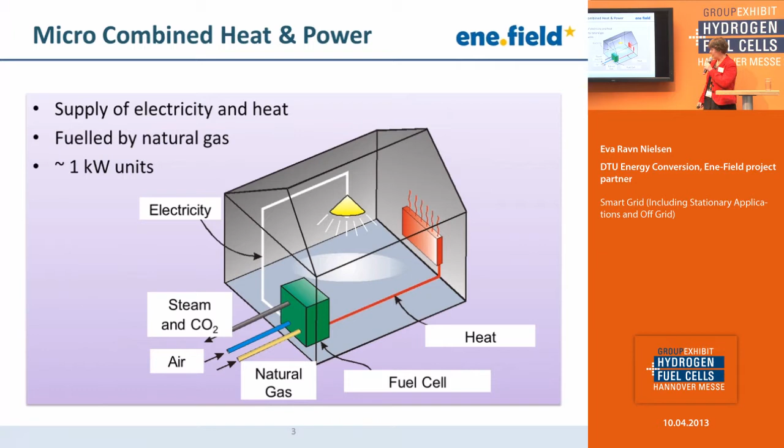Fuel cell micro CHP is highly efficient in electricity production. Compared to other cogeneration technologies, the electricity part is higher than the heat part. This makes this technology very useful for houses with low heat demand. As you probably all know, this is the direction European houses are going due to new building codes, where heat demands will become smaller and smaller. Micro CHP fuel cell based is a very good solution for this.

Further, fuel cell micro CHP is important for the future smart grid. It may help balance the grid by responding to the grid's need for additional electricity. It may be installed with an additional heat storage, and therefore it can maintain very high efficiency, even though it has to respond to grid needs and not only to the house's own energy demand.

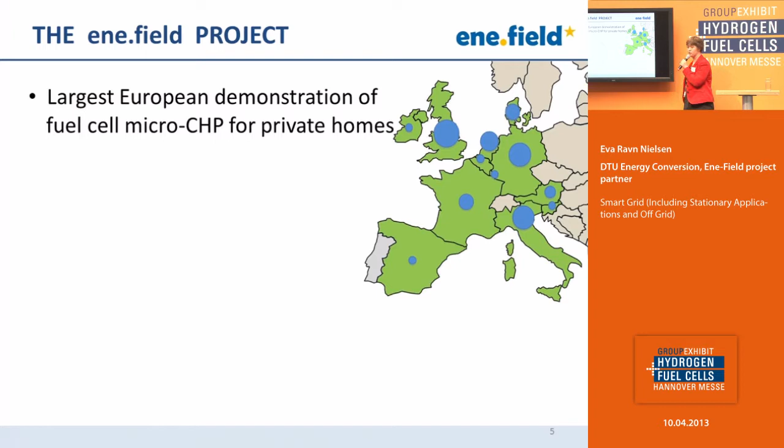Now, regarding the ene.field project: this is a high-profile project for the FCH Joint Undertaking. It is the largest demonstration project within stationary applications. It is the largest demonstration of fuel cell micro CHP units for private homes. It will install up to 1,000 units in 12 different countries over Europe. The project runs for 5 years, from last year until 2017.

The project consortium consists of as many as 26 project partners, which includes 9 large manufacturers of micro CHP units. It includes utility partners, as well as research institutes and universities, as the one I represent. The demonstrations include all the variants of fuel cell technology used in micro CHP, that is high as well as low temperature PEM fuel cells, and intermediate and high temperature solid oxide fuel cells. All these kinds of technologies will be demonstrated in this project.

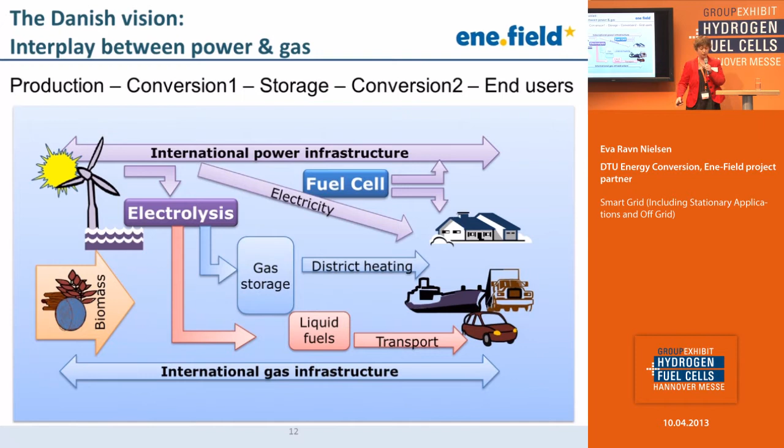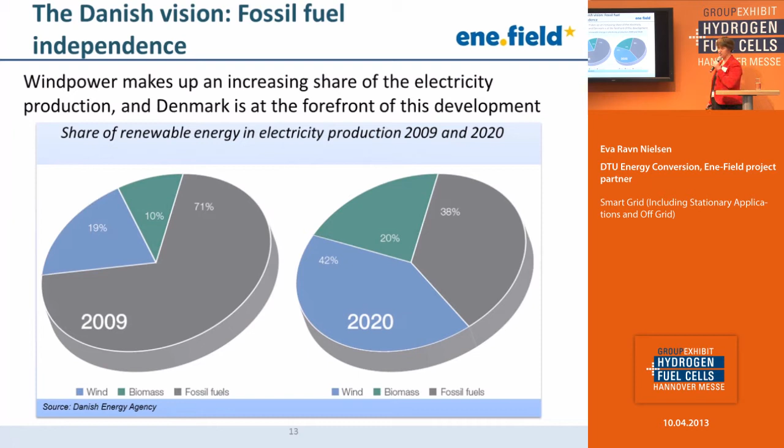To be independent of fossil fuel, wind power makes up a larger and larger part of the Danish energy system. In 2009, wind made up 19% of the electricity generated. Already today we are at 30%, and in 2020 it will make up 42% of the electricity production. This gives us some challenges, because sometimes the wind power is smaller than the overall energy demand. But already today, and in the future more and more often, the wind power covers all the energy demand and somewhat more. So we have to store this energy.

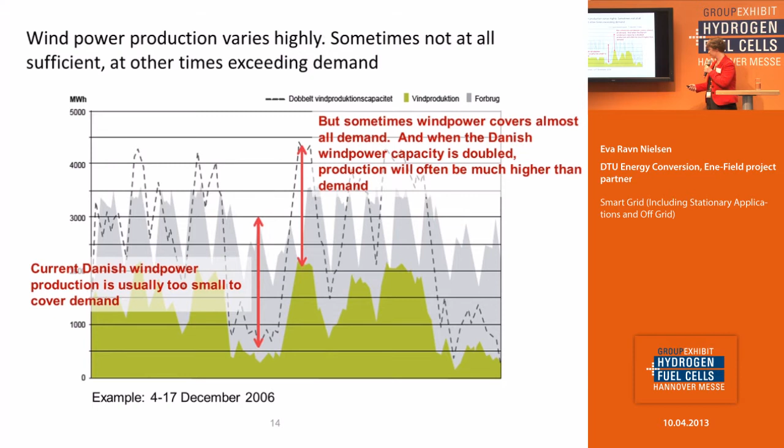Also, we have fluctuations on a short time scale. This is just to show you that from hour to hour, and within 15 or 20 minutes, there can be a very steep variation in what wind power is actually generated. Therefore, the grid needs balancing. Therefore, the future grid must be smart.

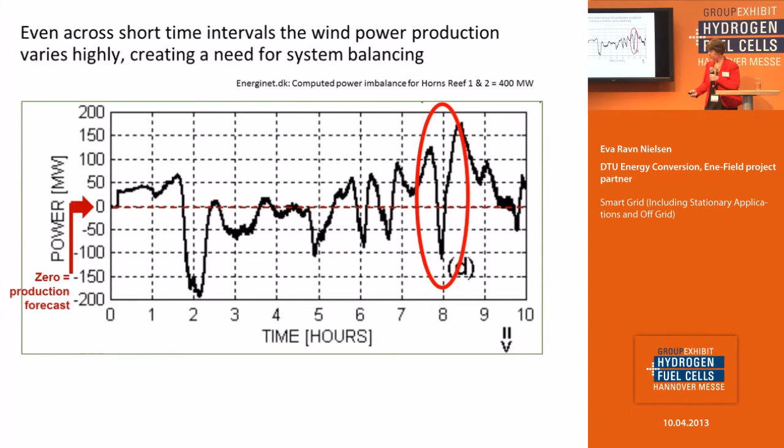So it was decided to take 4 houses equipped with micro-CHP based on fuel cells, and a communication protocol was made. Dong Energy has what they call the power hub that communicates and controls the energy demand. This was sending signals to fuel cell systems based on low temperature PEM produced by Dantherm Power, and the remote control software is already installed in the fuel cell control system.

There has been testing of 4 systems, 4 different houses in Denmark. They did not react on actual price signals; they were not depending on the electricity prices in Denmark. This was simulated by a schedule decided up front, but we were testing out if we send the signal, now the electricity price is high, you need to produce more to put electricity back to the grid, then the fuel cell unit should react.

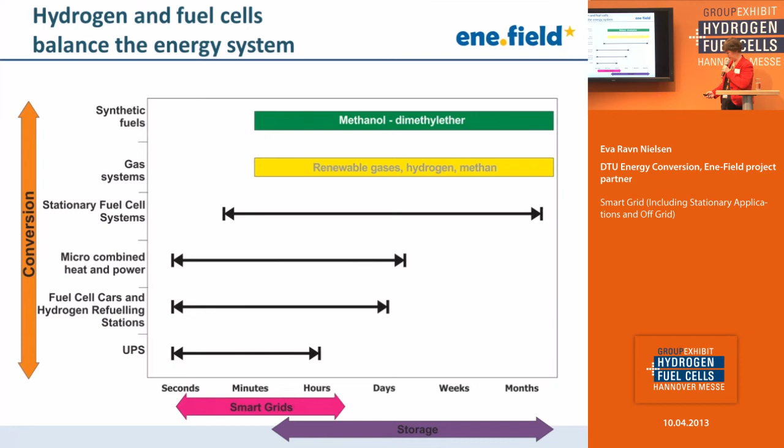The last project I will mention for you is the Smart Copenhagen project. I must say we have not started up yet. It's still under negotiation with the Danish Energy Agency, which is funding it. It will be a large-scale demonstration, megawatt scale, of electrolysis, hydrogen storage, fuel cells, and other hydrogen consumptions like cars and town gas. And this is going to start up just now and take place over the next years.

So, to summarize, micro-CHP is an important technology for the smart grid. And the large and important ene.field project offers opportunities, and we really want to go into more discussions with utility partners that would like to know more about this project and want to take part and be involved. So please contact us or partners. And I showed you that there are a lot of efforts in Denmark getting more knowledge on the smart grid, and I think this will not be the last thing you hear about the Danish smart grid efforts.

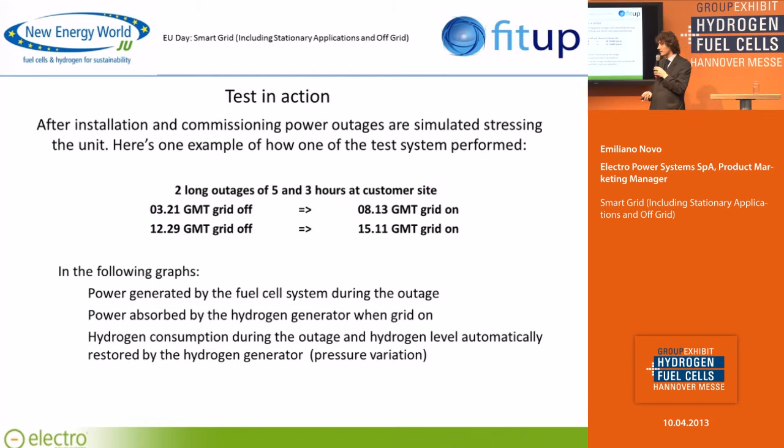Let me go back to this slide. This is a test in action where, after commissioning, we had 2 long outages, one of 5 hours and the other one of 3 hours. This is outside the FITUP project. This is a real exercise that happened in India.

Just to summarize, to focus on the particular application: when the grid is off, you can see that the fuel cell power system has to start suddenly and power the load. Typically, this is a telecom operator. Typically, a telecom operator has a load from 1.5 up to 3 kilowatt in a tower. If we are working in sharing or it is a very important tower, it could also increase to 6 or up to 10 kilowatt output.

So as you can see, in this case, we have a basic load of 2.5 kilowatt. When the fuel cell is running, the green line, the hydrogen pressure in the cylinder, decreases. When the grid comes back, the all-in-one solution, fuel cell and hydrogen generation, stops the fuel cell and starts to recharge the cylinders using the hydrogen generator.

But if I have another grid fault, I need to stop the hydrogen production and restart the fuel cell, another 3 hours. At the end of the day, when the grid is restored, I have the time to recover all the hydrogen in my cylinders.

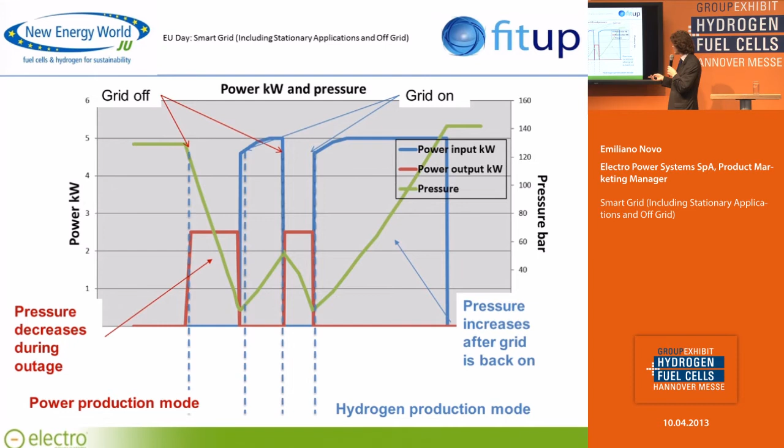After the experience of the poor grid, especially in Asia, we moved to thinking to use the ElectroSelf solution, that is the commercial product that Electro Power Systems sells, to couple the fuel cell and the electrolyzer with renewable sources, solar array or windmill. The fuel cell power system is a UPS solution only if you have a bridging unit that you have to put here.

You can put small batteries, you can put traditional batteries, or you can put nowadays batteries like lithium batteries, you can put supercapacitors as you want. But the point is that the kilowatt hours are stored in a chemical way inside the hydrogen tank.

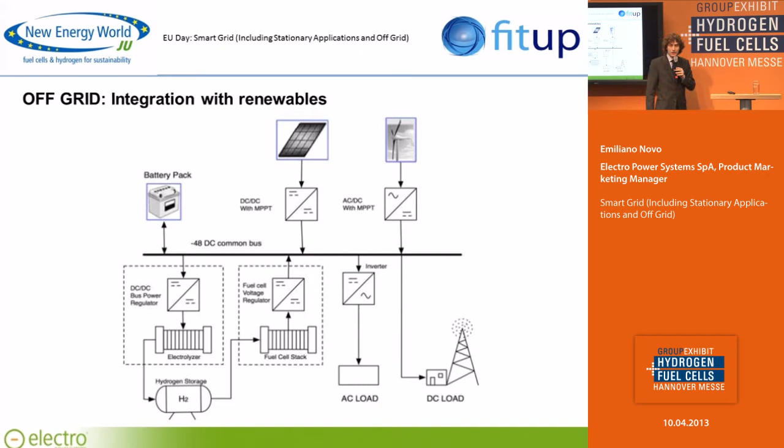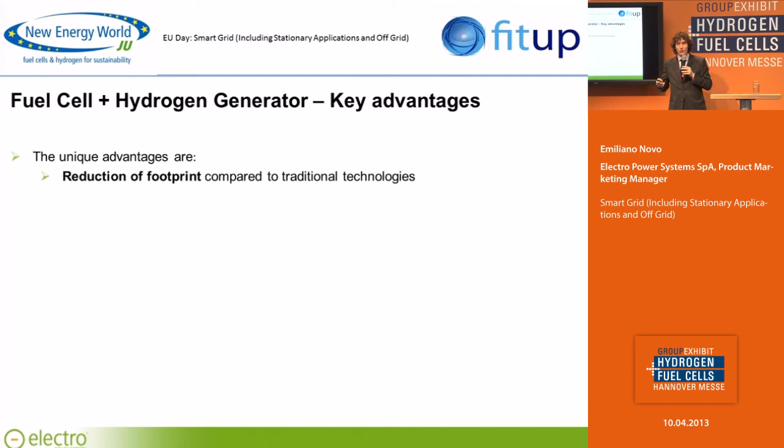The key advantages of this solution is the reduction of the footprint compared to the traditional solution, because you don't have to think about big batteries, or a big liquid tank for the diesel. Easy installation, because you have just to connect the positive and the negative cable to the DC bus. You don't have to think about a lot of electrical conversion, AC to DC, DC to AC.

Low maintenance needed. There is no rotating part inside the ElectroSelf product. It is a stationary application. So there is a fuel cell that is a static device. There is an electrolyzer that is a static device.

100% clean. Starting from electricity from the sun or from the wind and pure water, we can obtain again electricity when we need, because when we have plenty of renewables, we can produce the hydrogen. When we don't have the renewable sources, we reuse the hydrogen to obtain electricity without pollution.

The reliability of the system: it is a product based on the backup solution for telcos. Telcos ask to have 99.99% of reliability. So this is exactly what we need for the off-grid site where no one wants to go, in the middle of nowhere.

The flexibility and the modularity of the system is that you can have a solution from 1.5 up to 10 kilowatt on site in the same footprint, and you can have modularity: okay, my load changed because I started with just one single cell with 1 kilowatt load, but I need to increase because I have more customers in that area. I have to put other transmission devices. So I need to increase my power at site. I don't have to change everything in the site. I have just to add another component.

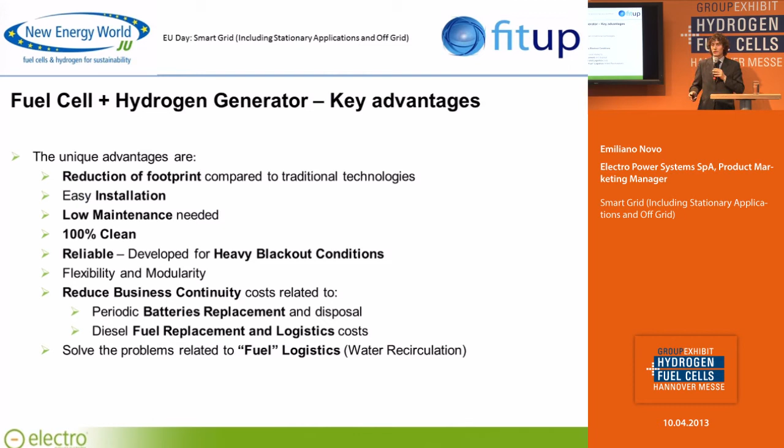With another innovative solution that we have in the ElectroSelf platform, we recirculate the water. So we're starting with demineralized water. We generate hydrogen. From the fuel cell, we have water as a waste. Why not recover it inside the starting tank? This is our internal solution.

And I link with the presentation before, the hydrogen is the perfect link with the irregularities that are coming from the renewable sources. So if there is a cloud that covers the sun, there is no electricity from the solar array, we need to start the fuel cell. And we can cover the gap of the electricity using the fuel cell. At the end, when the cloud is over, we can stop the fuel cell and generate new hydrogen.

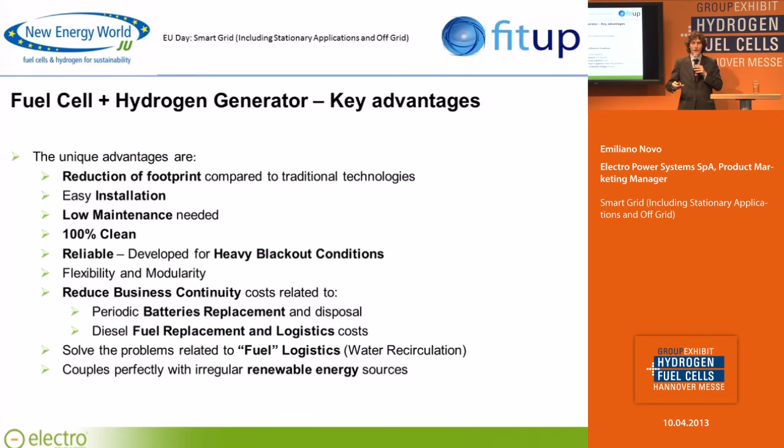The other important point of the Electro Power Systems technology is that coming from the water and the electricity, we split the water molecule into hydrogen and oxygen.

Obviously, for the fuel cell, we need the hydrogen, and also we need the oxygen. Usually, oxygen is taken from the air, but why do we have to disperse the oxygen and pay in terms of electricity with a blower to blow the oxygen inside the fuel cell? Our decision is to, in some applications, because we have two platforms. One is the AirTech platform, and one is the DOX platform.

So, in some applications, the DOX platform uses the hydrogen stored gas and the oxygen stored gas produced by the electrolyzer; when we don't have electricity, we reuse hydrogen and oxygen. In this way, we are increasing the total efficiency of the system,

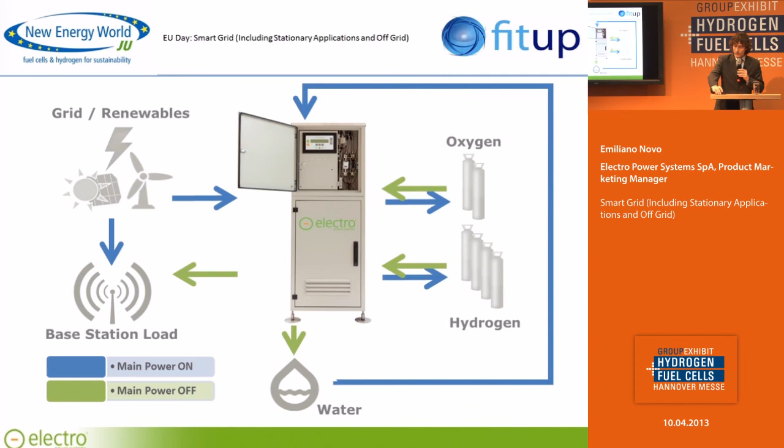So even in Italy, it is possible that there are some hills where at the top it is perfect to put a Wi-Fi antenna to cover a large area with WiMAX radio apparatus. But you have to spend a lot of money to connect this antenna to the national grid, because it is more or less 5 kilometers, and it costs 20,000 euros per kilometer.

At the end, you can have a solution with solar array and micro wind - even though the north of Italy isn't good for wind, we wanted to show in the pilot that it's possible to couple both renewable technologies with our solution. And we put - not the first prototype for the ElectroSelf platform overall, but the first prototype for the ElectroSelf coupling with renewables.

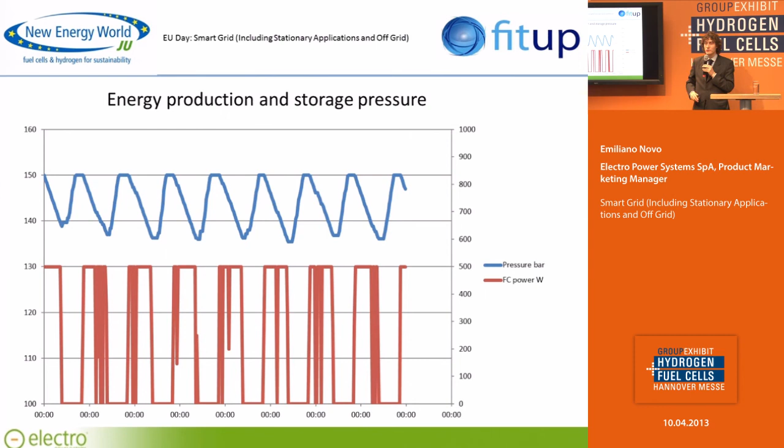To move to the conclusion of my presentation: for the on-grid fuel cell backup, this is a reliable and cost-effective solution if you are thinking not only the CapEx, but the TCO cost. In the near future, we expect to use the on-field test in the FITUP project, thanks to FCHJU sponsorship, to decrease the cost and compare CapEx by CapEx. But this is the only solution for off-grid sites, to couple the backup with energy storage, because this is the only way we have right now to accumulate energy without spending a lot of money.

This is not a conclusion that I wrote just for this presentation. This is what we have offered starting from 2009 worldwide, and it is acceptable for all the customers we have. The point we still need to fight for is that, okay, this is a very good product, but we need to see some on-field installation before taking the first step. So thank you to the FCH-JU for the opportunity on the FITUP project to show the real situation, that there is a solution that works better compared to the traditional solution, and it is also green. Thank you very much.